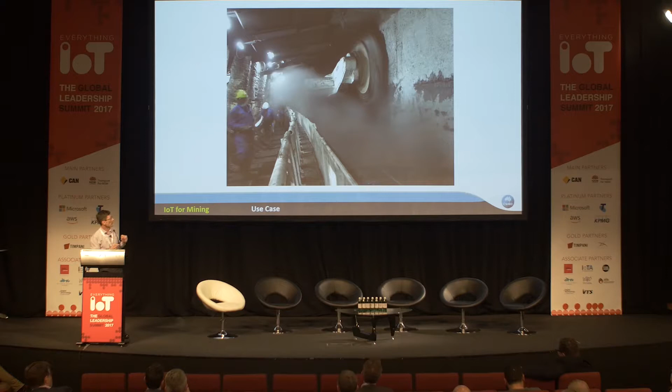The machine you saw earlier, the longwall shearer - effectively, dust is there. That great big long line you see should be a straight line. There's also a person there who's not only controlling a ranging arm drum, probably 2 or 3 meters high, but also trying to navigate. The direction of mining is actually to your right, so he's slicing coal backwards and forwards with these other guys here. It's an incredibly difficult job, and one of his biggest problems is not actually knowing accurately the location of that piece of equipment.

So this is what we need to see: nobody there, completely straight, computer driven.

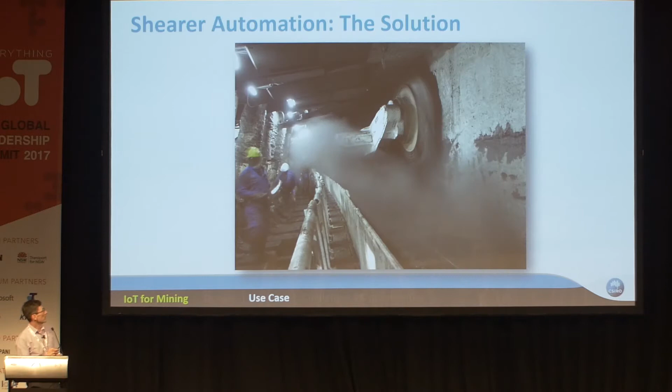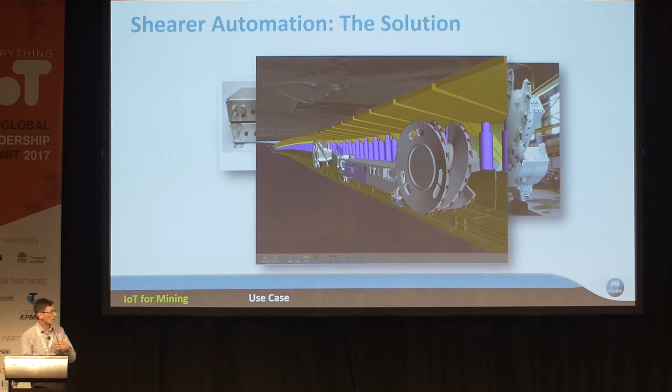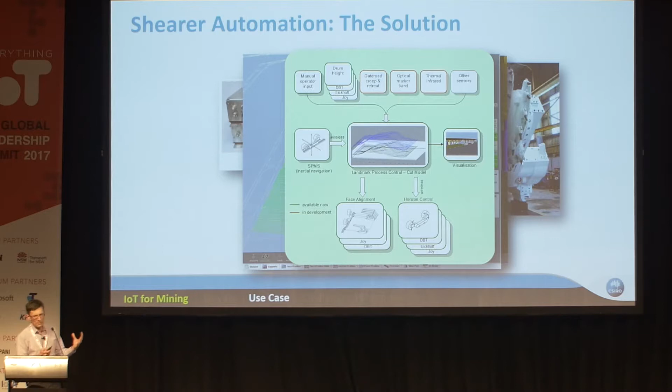One of the things we did was take a high-end inertial navigation system and embed it in the body of the shearer itself. From there, we were able to generate 3D visualizations at a remote location, providing information. Suddenly we're able to archive the path and progression of the equipment itself, and further on, that provided the genesis for an integrated model. But really the core of it was sensing - once we had that sensing component in digital form, it enabled a whole bunch of other technologies to come in.

And it can be operated remotely using exciting VR and AR experiences if necessary. That's the kind of state of the art in underground coal mining automation. But where can we go from here?

Another component of that - we might know where the machine is, but it's really important to know where the geology is, so you can actually center the machine with respect to the host geology.

This is a camera that is approved for use in an underground coal mine - I'll come to it later, but there are some special requirements to actually have equipment working in an underground coal mine. So the idea is, to the left here you see a pretty much off-the-shelf camera having to be enclosed in maybe a 10 or 15 kilogram enclosure.

It's called a flame-proof enclosure. The concept is it's not to protect the equipment, it's to protect the rest of the world if the equipment fails. If it has to operate in a methane-rich environment, it could cause an explosion. So equipment is really hard to get underground.

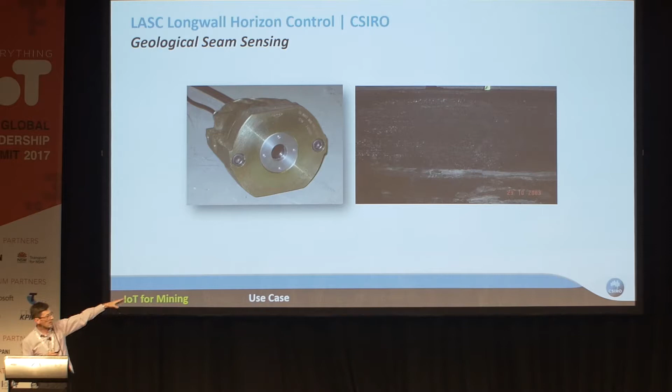But here's one system here. The idea is that if we can utilise this type of camera technology, you can utilise natural features that are apparent in the geology. In this case, it's a marker band, used as a datum for horizon control. So we had a whole array of them, which is probably our first go at the Internet of Things. It's looking at things at scale, bringing those things together to provide a complete face picture.

Exciting, interesting. The most important thing for the customer is, well, what's the impact, what's the value? This particular innovation is known as LASC automation, and it's really had some great benefits to the industry, high uptake. Probably one of its biggest things is minimising transaction cost and downtime. It's been accessible - one of our big areas was about making it open and accessible. And finally, the return on investment is enabling further development.

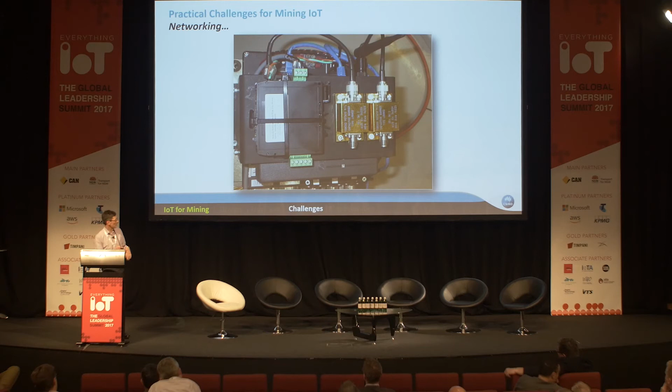If you want to use Wi-Fi in these environments, you can't just walk down with your mobile phone. You have to go through a whole range of extra processes. Those little two shiny boxes, there's a company here in Sydney who will happily sell you them at a couple of thousand dollars each. They're approved. They let you use your Wi-Fi externally because they have a capacitor and an inductor in there that's been approved for use. So it just makes everything that extra bit more difficult.

What are the other very practical challenges for IoT and mining? The immaturity of the whole industry means chaos. There's some people who love it, champions. Others are concerned about what does it all mean. Interoperability, a lot of these things you've heard over the last day and a half. Management, who owns the data? How do we utilise it?

Opportunities: the industry is recognising that it is actually increasingly becoming an information-driven, closed-loop operation. So we really want to see the loop closed. At the moment, most of it's find it, mine it, off you go. But we want to see some provenance across the whole value chain. Looking at how we see this information, how we distribute it well, how we have automation that is actually at high integrity, and to that, sensing is critical.

A lot of the processing components and display components kind of already exist, but really sensing is key to all of that. A quick one, if any of you have heard of the book The Sixth Wave, what are things that are going to drive this innovation? It's a fantastic book written by a guy who used to work for CSIRO. I think the biggest one, he wrote this back in 2009, which at the time, now you read it and say, oh yeah, that's obvious, but he was talking about we are increasingly moving into a resource-limited world, and we're going to see this increased movement to resource-oriented delivery. So I guess in the things we're talking about with IoT, it's really democratizing the whole service provision. So it's really about minimising transaction cost, which is a kind of optimisation ultimately.